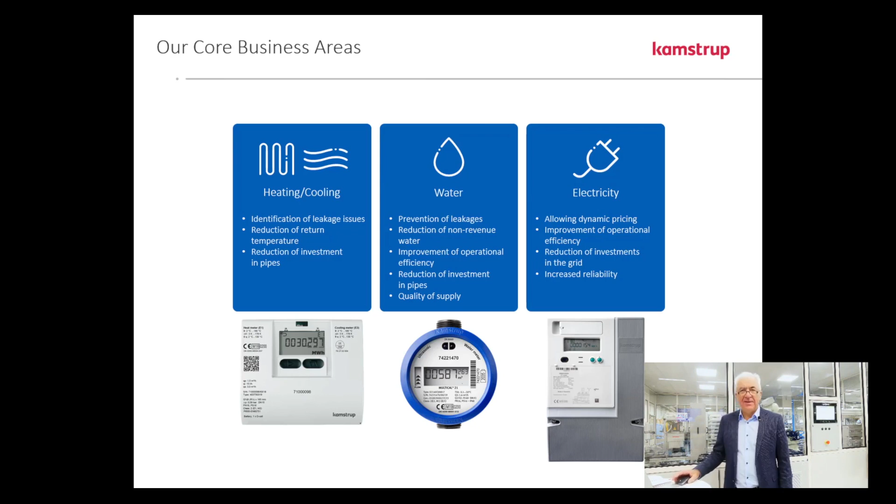I will in a moment briefly show our solution. A quick look at our locations: the Kamstrup solutions are basically sold to around 80 countries around the world. We are not global yet, but we are working on it, and we have reached 80 countries by now. Out of these, we have our own offices in 23 locations in Europe, in the US, and also here in Asia.

Where we have offices in China, India, and in Kuala Lumpur, the Kuala Lumpur office being what we call a regional office for the Asia Pacific region. In all the remaining countries, we have got distributors that we work with.

You may, to a high extent, regard Kamstrup as a technology-based and very innovative company. We are altogether around 1,500 people. We put a very strong effort into product development and innovation, and I can mention that more than 300 people, more than 20% of our colleagues, are working on innovation and R&D around the clock. So this really plays a big role for us.

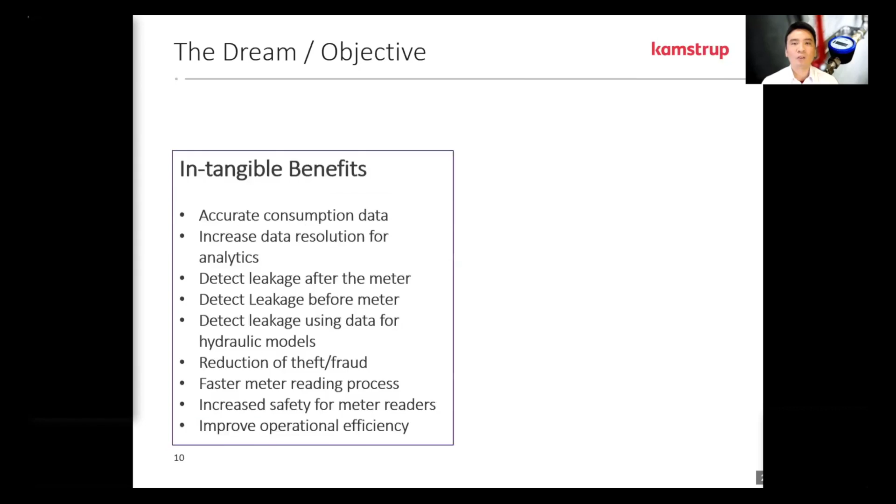So the approach to this, as of today, for many utilities, is to try new things. Let us put a module on a mechanical meter, and then have it transmit data once a day. We have hourly data, let's see what we do with it. Or maybe I try a low-cost static design. The idea here is to manage cost. We want to go to something smart, and in order to pay for itself, it has to be low cost. That is the approach.

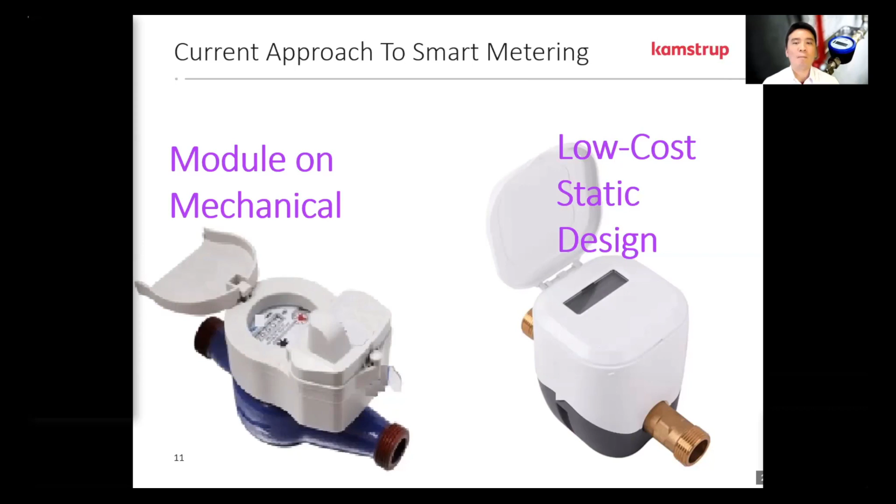However, my suggestion is different. We need an approach where we let smart metering pay for itself. Instead of limiting us to using a low technology approach, like I showed earlier, or a less reliable approach, let's use something more reliable, but pay for itself first. So how do we do it?

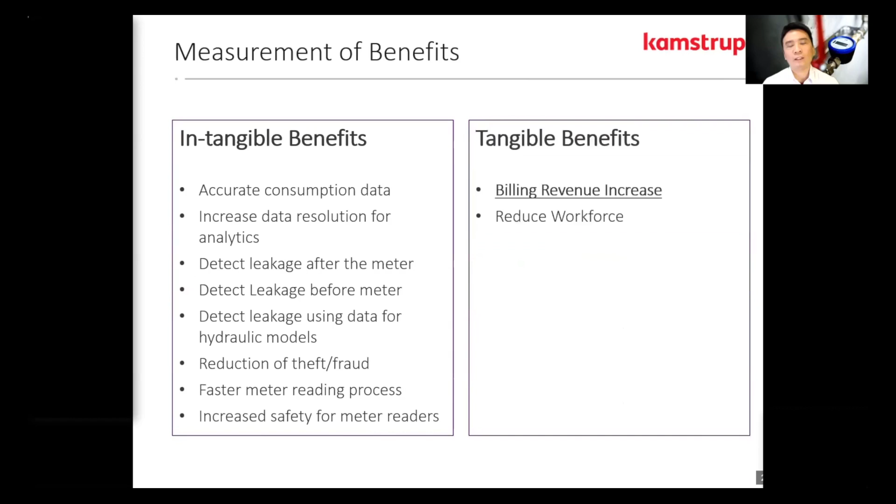Earlier I talked about the intangible benefit. Now let's focus on the tangible benefits first, meaning, in this case, billing revenue increase. If we replace smart meters, we know workforce will be reduced, but that's not our key topic here. We are looking at the meter itself, so billing revenue increase.

Under billing revenue increase, we also have two segments. The first one is non-measurable billing revenue increase, and this has to do with elimination of estimated reads, prevention of meter tampering, but we don't know how much of that is happening, so we can't measure it upfront.

But what we can measure upfront, for example, is the replacement of stuck meters. If the meter is clearly stuck, you replace it, and then you look at the revenues, you can kind of tell how much revenue you have gained, or with a badly deteriorated meter, or resizing meters that are wrongly sized.

So let's focus ourselves on measurable billing revenue increase. Now, what utilities have been doing to increase or protect its revenue is to replace the meters. This is done by all utilities. So you have an existing meter, and as the accuracy falls, or the error increases, you replace the meter, and then it falls again, and you replace again.

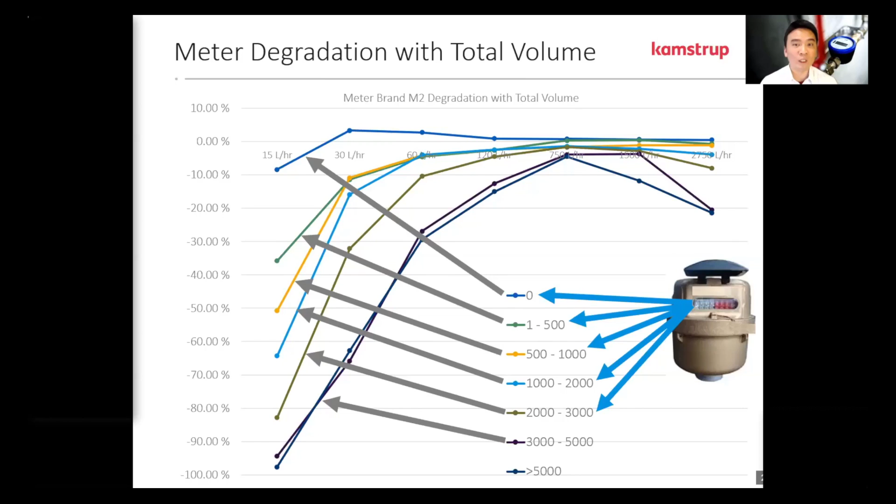You can see this is a new meter at 0. This is a meter that's just started being used, about 1 to 500 meter cube, and so on. As the mileage increases, the worse it becomes. When I say worse, what do I mean? If you look at the left side of the graph, that's the error, the percentage error on the meter. And at the very bottom, you see about 100%.

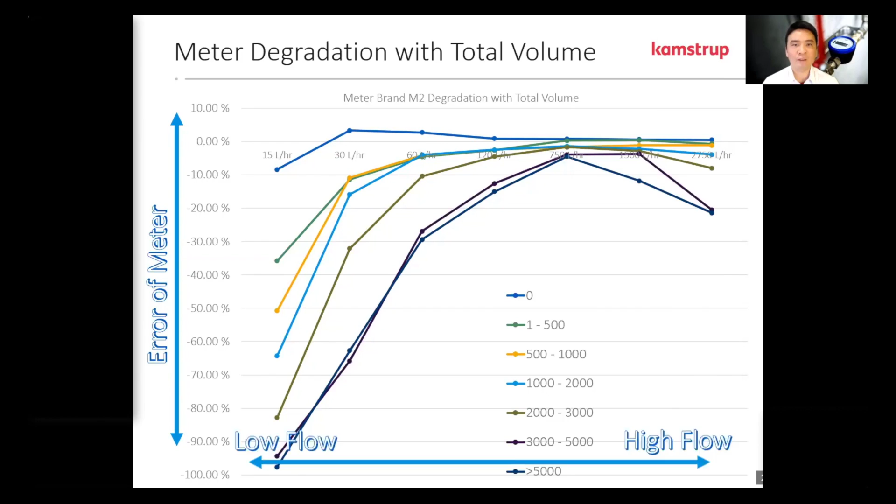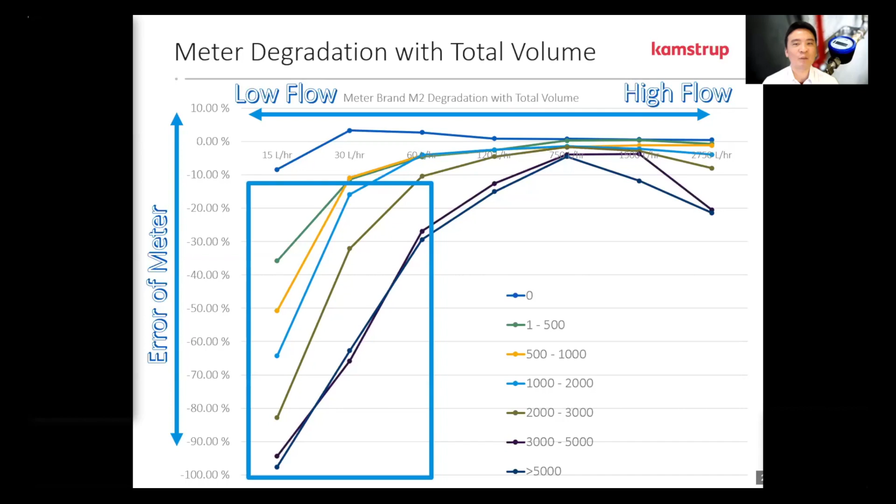Negative 100% is hardly reading anything at that flow rate. And when I say flow rate, on the left and right chart, the x-axis, on the left side you have 15 liters per hour, for example, that's the low flow for this meter. It's an R50 meter. So you can see how the efficiency really impacts the low flow of the meter. It makes even less sense if you buy a high dynamic ratio mechanical meter, like an R400 or R800 - it hardly makes any sense.

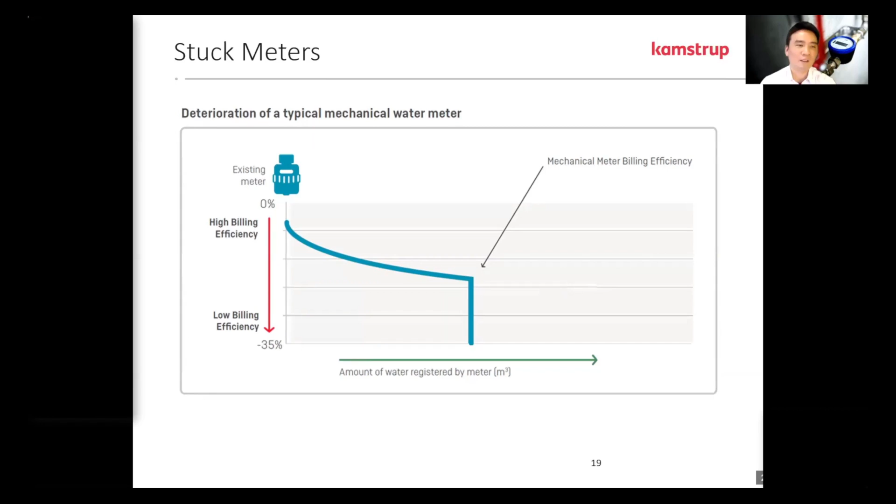You're lucky if the meter deteriorates like that, that's a normal deterioration process. When I say lucky, it could go from a certain percentage all the way down to negative 100. These are stuck meters, and I don't need a research paper to back this up. Talk to any utilities, they can tell you all about stuck meters. It happens all the time, and it has a lot to do with water quality in this case.

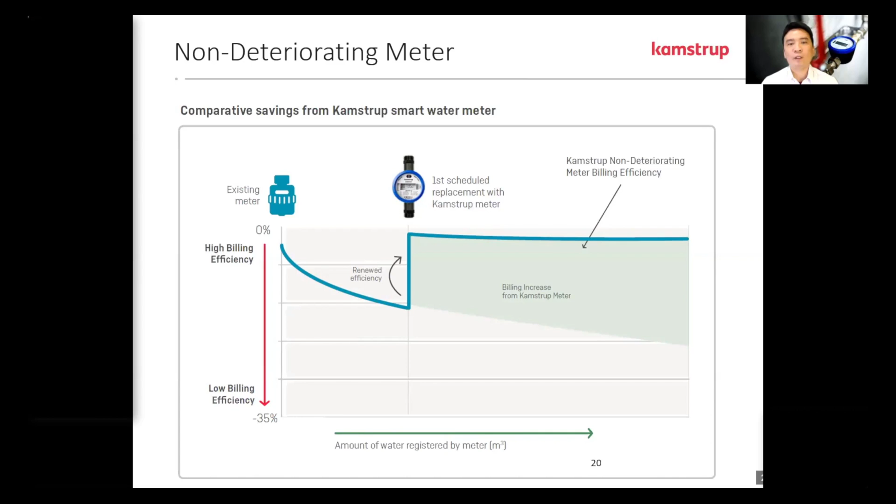Now the idea here is to put in a non-deteriorating meter. If I replace a meter and it stays accurate throughout its lifetime, what's that lifetime? In Kamstrup's case, it will be 16 years. How do I reflect that comparing with a mechanical meter, for example? When I replace a mechanical meter, the kind of savings I looked at in this particular research would be about 5%, based on this particular research.

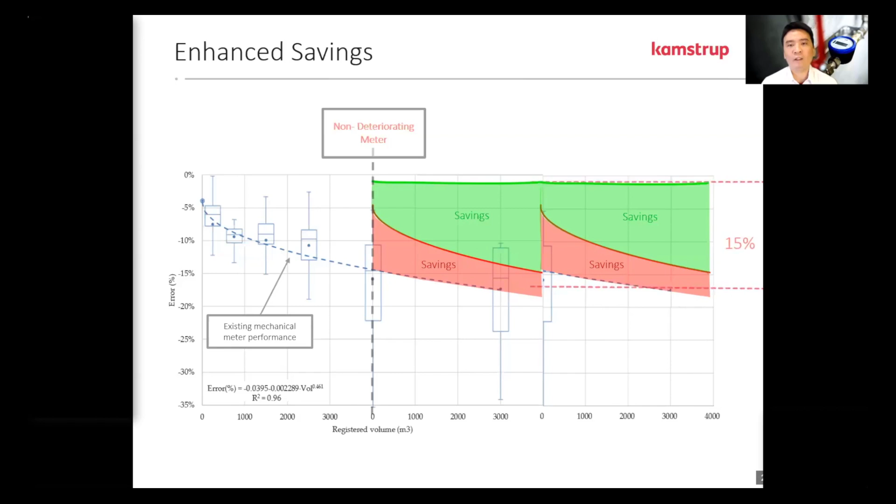Now if I can put in a non-deteriorating meter that stays accurate across the board, what does that mean? It means I replace upfront with one non-deteriorating meter, and then I do not have to replace any more after that until the meter dies, which in our case is 16 years. So the savings just on the billing revenue protection side is 15%. We are not suddenly jumping the bill and customers going crazy why the bill is so high. It's not — we are simply providing a meter that does not deteriorate, that's all. It's not going to give you some fictitiously high reading. It's simply protecting your revenue over time, and you don't have to replace it afterwards.

And how do we know this is true? Well, if you look at Kamstrup's experience and application in Europe, many European countries require you to revalidate the meter after a number of years — in this case, about 6 to 7 years. So there's this particular case whereby we have 1,308 meters being tested from the field.

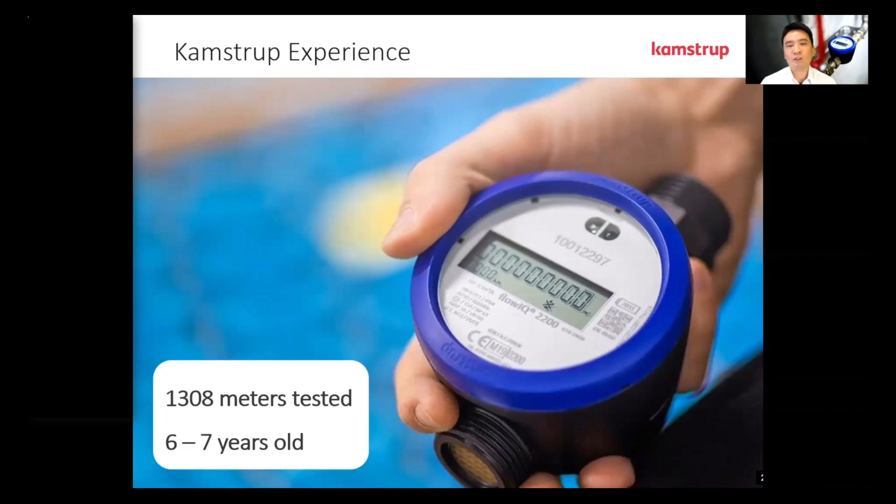This is from the customer. We are accredited to test meters, and they send it back to us for re-verification as required by law, so we retest it. After those number of years, 96% falls within plus minus 2% error — this is new meter territory, brand new, better than new in some cases, because our low flow is also plus minus 2. And then about 3.7% is double that, plus minus 4% error, which is acceptable overall. And if you look at it, only 0.3% is out of spec, out of the plus minus 4%.

I'm not talking about negative 100% like the mechanical meters, it's just outside the plus minus 4%. So generally we say that our meters will last and be accurate for the whole 16 years of the battery life. We have experience on that.

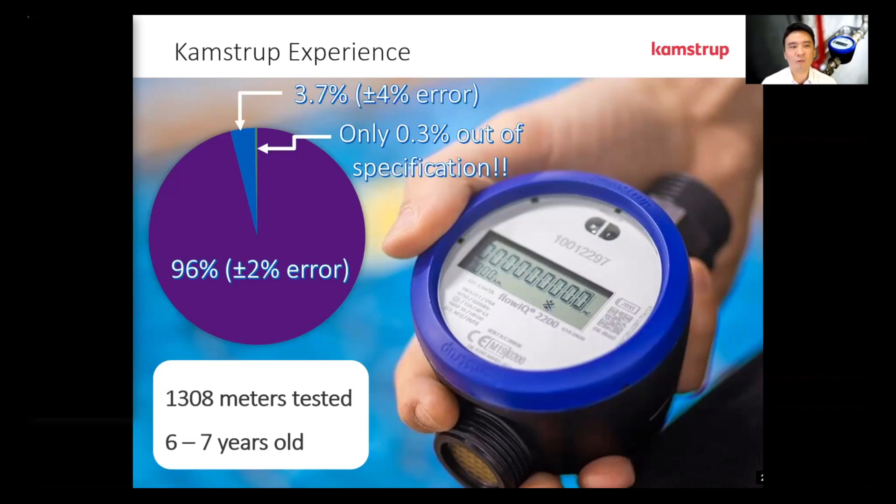So the enhanced savings — how a smart meter pays for itself — is that first, you put in a smart meter that is robust, that can last the life on field, so you don't have to replace it over time. And then you have this high level of billing revenue protection, so that pays for itself. And then we can have meaningful, tangible and intangible benefits. We talked about intangible benefits earlier, detecting leakages, using data for analytics — now that can also be meaningful.

It does not need to be just, well, I'm going to put in a meter, gather hourly data, and then let's see what we do with it. I'm going to put it into this very robust software I have, and run everything it can do for me. Well, let's be more specific — there are ways we can be more specific.

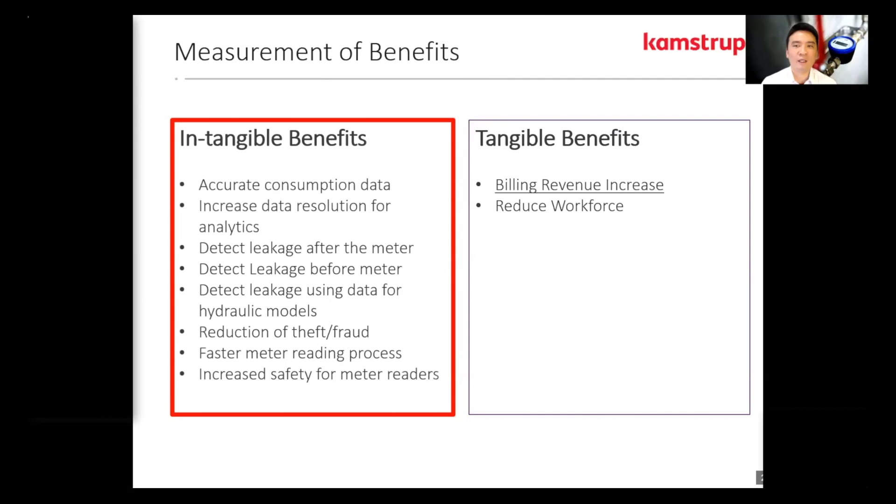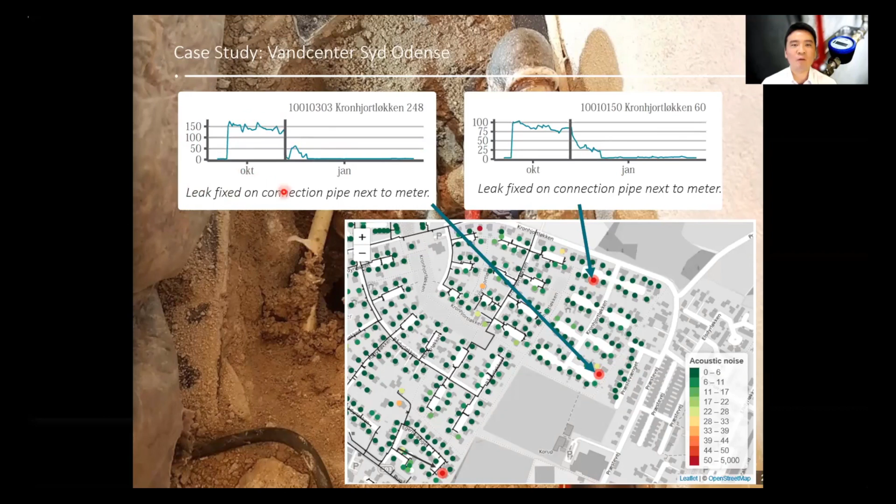For example, the meters from Kamstrup have this acoustic logging capability. In this case, you're looking at data from 2 particular locations where the acoustic spikes, and the customer found the leak and repaired the leak. This is in Vandcenter Syd in Denmark.

It has to do more than just sending a meter reading data every hour, you know.

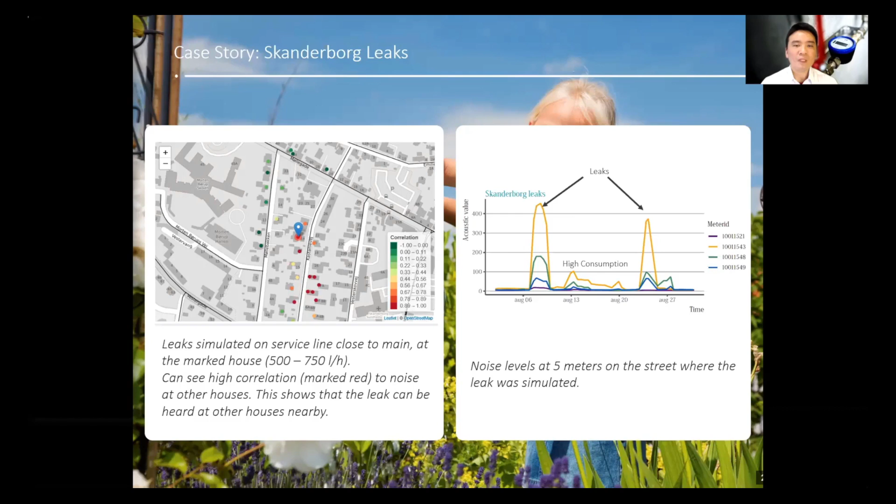If we look further, the use of smart meters has many benefits. Hidden leakages we want to find, under-metered points, under-metered usage, and so on. So how do we address those issues?

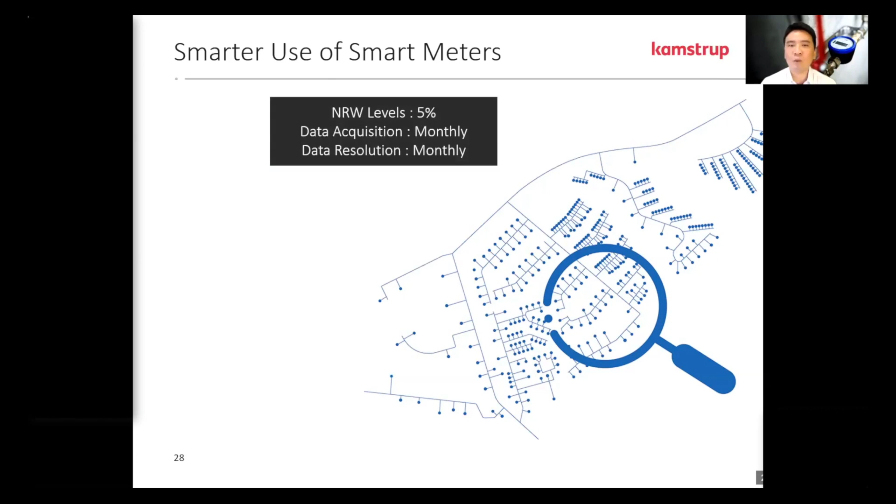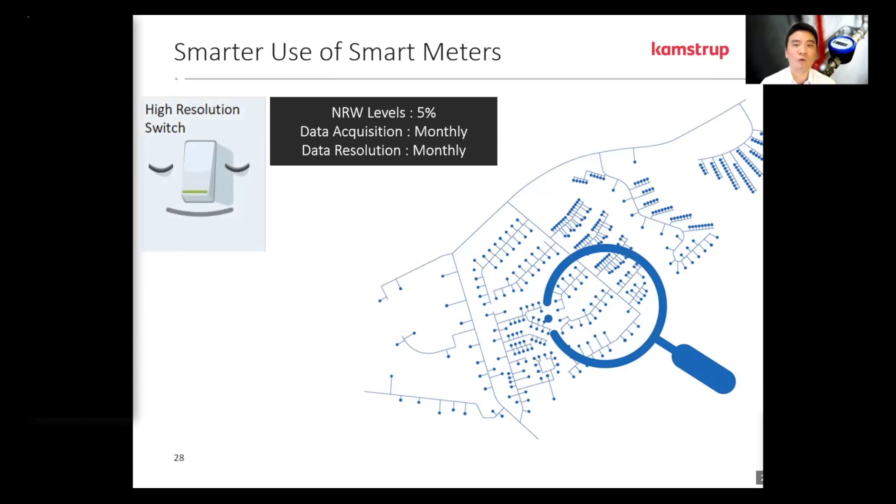What we want to advocate is a smarter use of smart meters. For example, if we have a DMA where NRW levels are low, we can do monthly acquisition, data resolution can still be monthly, and the high resolution switch is turned off. We run things as usual, so when NRW levels are low, my meter reader will just drive by and read as usual. This eliminates data accuracy issues, estimate reads, and things like that.

Now let's say there's an issue for this DMA and the NRW level has spiked. You're collecting data every month, it's accurate and timely, and you use it to measure NRW, and that NRW spiked to 15%. So you continue monthly acquisition, but now you want hourly data resolution, meaning if I go there I have two months of hourly data I can retrieve from the meter. Basically, the meter is a logger in this case.

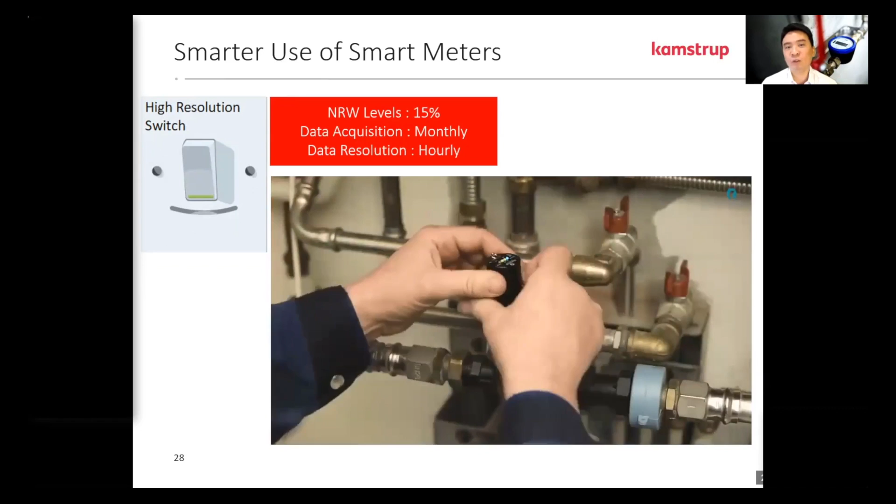So I switch on high resolution, but the way I do it is my meter reader now goes to the site and extracts this data from the meter, meter by meter. Maybe before extracting the two months of hourly data, they can go out and install pressure loggers across the DMA, because combining pressure logging data with flow data, hydraulic models today can detect possible leakage locations quite accurately. It balances the two pieces of information to find possible leakages, and then I send my non-revenue water team to go have a look.

But think about it, the process I just mentioned, we can elevate this whole process into the meter reader role. No more human resource issues of firing people by the masses. Socially, it's not good for the utility, and from a human resource perspective it's also expensive.

So let's retrain meter readers, have them drive by and read those meters every month, and when there's an issue, empower the meter readers to become owners of the DMA. Let them go out to site and extract hourly data, request data loggers, install them because they have the extra time now, collect the hourly data, send it to the hydraulic modeling team for analysis, and bring that analysis to the non-revenue water team for site verification and repair. Then the meter reader becomes what we call a non-revenue water technician, who can be compensated based on performance, with KPIs now based on non-revenue water.

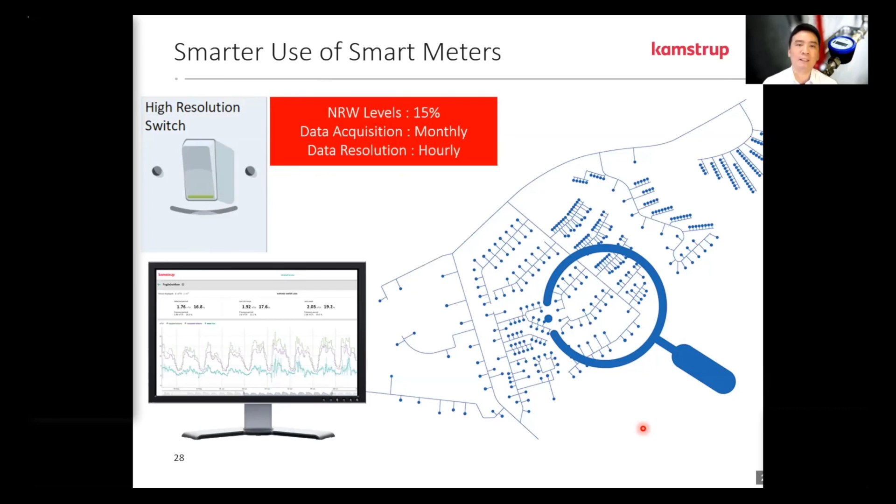So let's elevate people within the utility. Let's not get too deep into how to extract hourly data from a meter using a very blind, crude approach. Let's look at what we can do to maximize what we currently have, and let smart meters be smart, not try to make a dumb meter smart instead, because that can be very costly and doesn't get us anywhere.

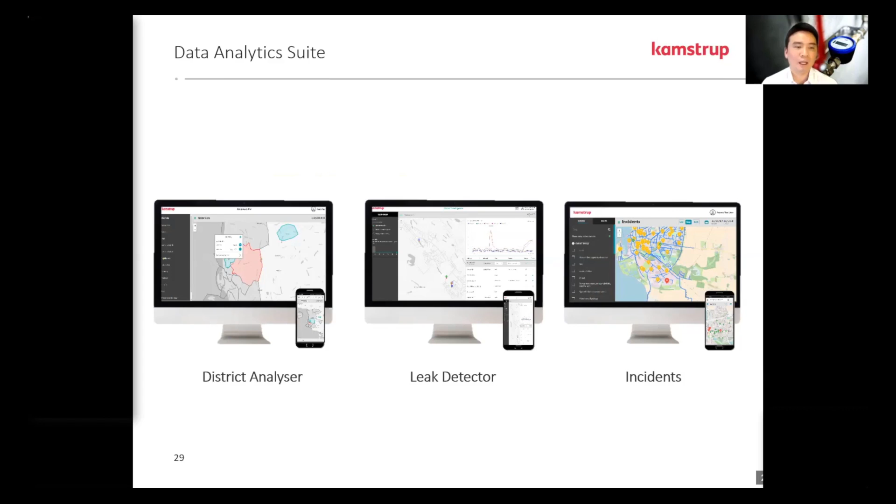If we look at the kind of analytics we can do, like here from Kamstrup, from analyzing the district, detecting leakage, recording incidents where problems have occurred to find trends in those incidents—many things can be done. If there's any question, please reach out to us from Kamstrup.

This is our message: it's all about having a financially sustainable approach to smart metering, and then a smart way to roll out real smart meters. Thank you very much for your time, and I hope you enjoy the rest of the event.